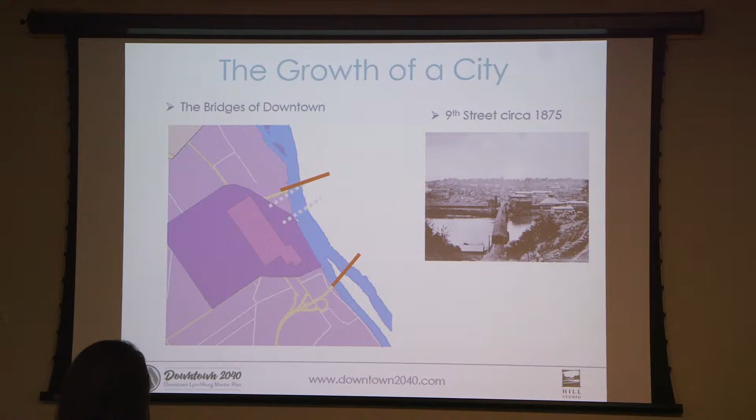Originally into downtown, you came in at 9th Street, and this is the 9th Street bridge circa 1875. Then it pushed away to the Williams Viaduct on 7th Street, the John Lynch Bridge at 5th Street, and Carter Glass at the 29 Expressway. These are the different bridges.

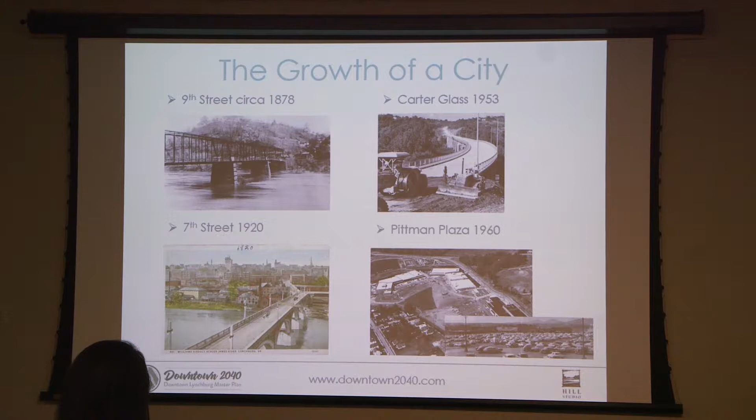What's also interesting is we're not building infrastructure like we used to. This is the Williams Viaduct at 7th Street, what a beautiful bridge. And we replace it with things like John Lynch, a major gateway to our city that was constructed in 1988.

And I'm back here somewhere playing the trumpet. I remember this day very well.

And just as the transportation improvements went around Lynchburg instead of coming into center city, the transportation improvements also had a profound effect on the neighborhoods in the downtown.

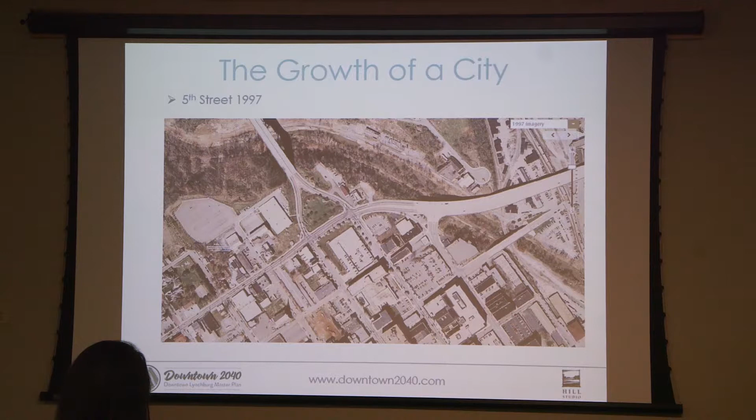Between 8th Street, it can be argued that this is really the reason we are here this evening. It's the reason why we've had a successful downtown, and the reason that quite a bit more can be accomplished.

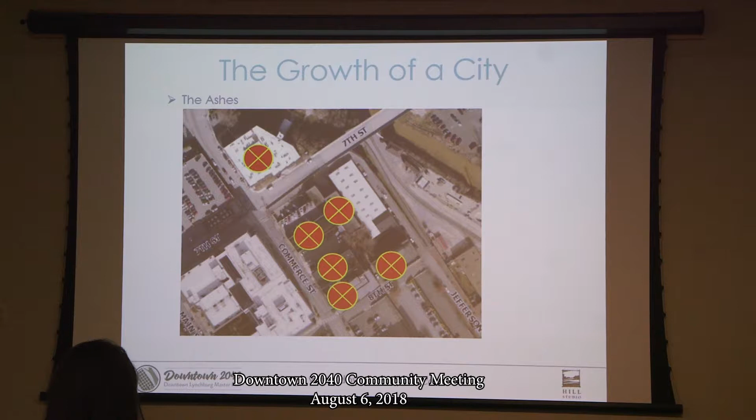In 1998, the new community development director at the time, Rachel Flynn, received word that these 6 buildings were going to be demolished, to make way for surface parking areas.

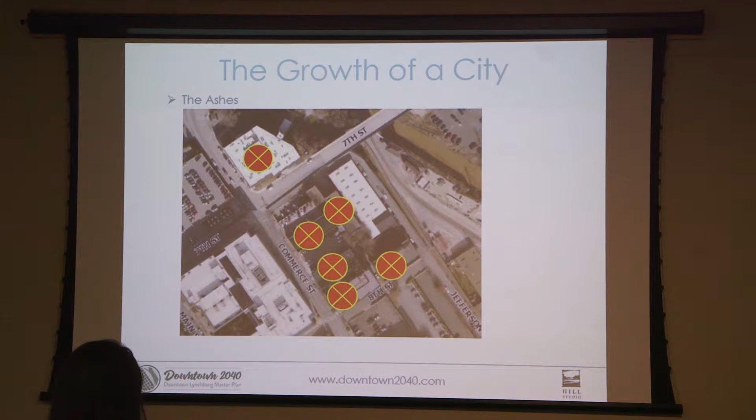Rachel started forming relationships with the owners, historic district people, leaders, the Lynchburg Historic District Foundation, the National Trust for Historic Preservation, the News and Advance, and other local leaders to bring attention to the plight of these buildings.

Rachel, local leaders, and the citizens of Lynchburg at the time did not accept the status quo anymore of tearing buildings down and building surface parking lots, because once you start to lose so much of your history and your fabric, you pass a point of no return.

Albert Einstein said we cannot solve our problems with the same thinking that we used when we created them. This is so true, because after those buildings were saved, the city and the community embarked on a master planning process that led to the creation of the 2000 Downtown Riverfront Master Plan. Part of that kickoff, Mayor Joe Riley from the city of Charleston, South Carolina came and shared his vision of Charleston with

I'm sorry, I'll hold the mic up.

He came and shared his vision of Charleston with us. And when Mayor Riley was asked, well, how are we going to fund these improvements? His response was, it's not about the money, it's about having a vision. And that is so true. It's about having a vision. And that's what we're going to talk about tonight.

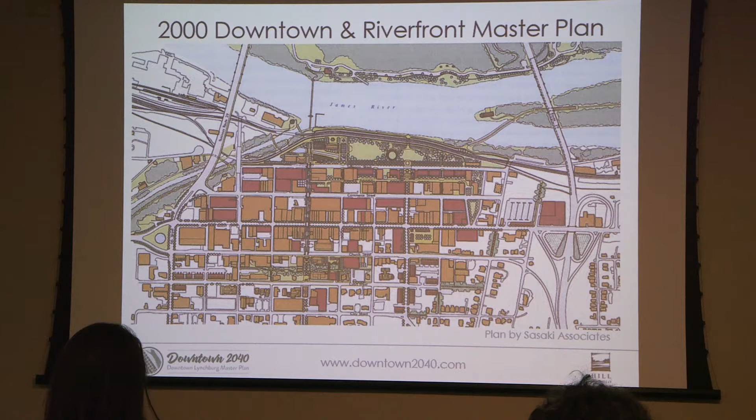One of the things the Sasaki plan recommended was urban infill—you've got a number of buildings shown in yellow that can be infilled with the red ones you see. Another was that it elevated the park system, shown in green, to the stature of the other downtown pieces, thinking about this for the first time in Lynchburg—the riverfront park, Amherst Park across the river, Percival's Island, and smaller places downtown. The park system became a very important player. The third piece recognized, for the first time in planning, the importance of the James River in orienting many of the things that go on downtown. That was the blueprint 20 years ago.

Here's your new blueprint, what we call the 2040 Downtown Master Plan. A lot of the work of the Sasaki plan is continued and sustained—we're not finished yet. The dark colored buildings are ones that still have infill opportunities, and you'll see the continued importance of the park system. But you'll see other things in this plan that make it a little better: we're going to continue the progress of the 2000 plan but go a little further, taming the car and recognizing its place in a thriving downtown, adjusting the city to make every downtown space walkable, living, and enjoyable. After all, in addition to the businesses, you now have over 900 apartments and over 1,400 people living in this downtown.

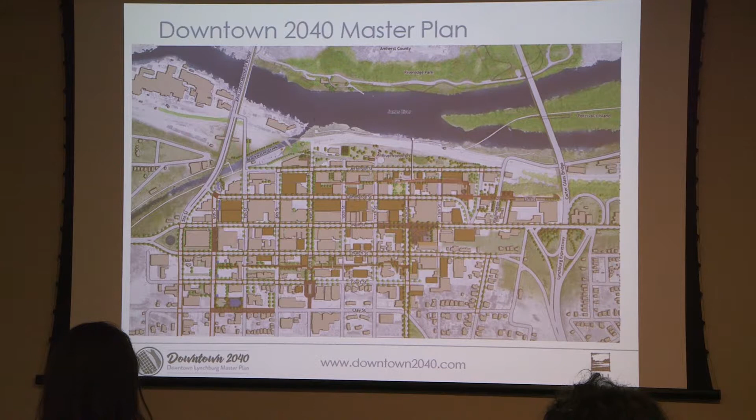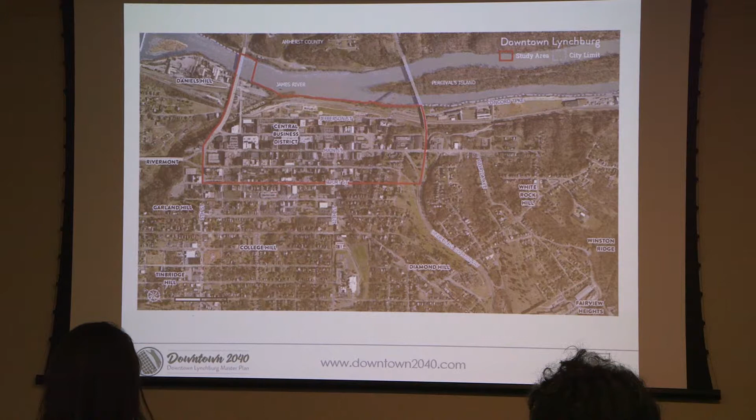The next several slides show some of the building blocks of how we're coming up with our plan—we call these the basics. One of the basics is the study area. The red area on this map was the study area of the 2000 plan, and we're going to continue with that general study area for the 2040 plan. However, we'll be expanding beyond that border to look at inner neighborhoods and going down the river a bit to capture some of that, so this plan will look at how we connect a lot of the neighborhoods into the downtown.

If that wasn't enough, we did a big kickoff event. Many of you might have been there, where we had gigantic chalkboards where people could write down what they thought they really would like to see in downtown. We had online surveys, and there's a notebook of all that data that has come in that is as big as a telephone book. And we had a web page that was up during the entire process so that people could comment and react to the things that they were starting to see.

So you might have gone to some of these other things. We had listening sessions, especially focused to certain issues. We had pop-up events - I don't know if you saw the planners around town with their little tent and some of these flags, and they had a big bowl of Reese cups to try to get you to come and talk to them, and it was pretty successful. And we had a design workshop where the whole design team came and worked for the greater part of a week at the Craddock Terry, coming up with some ideas.

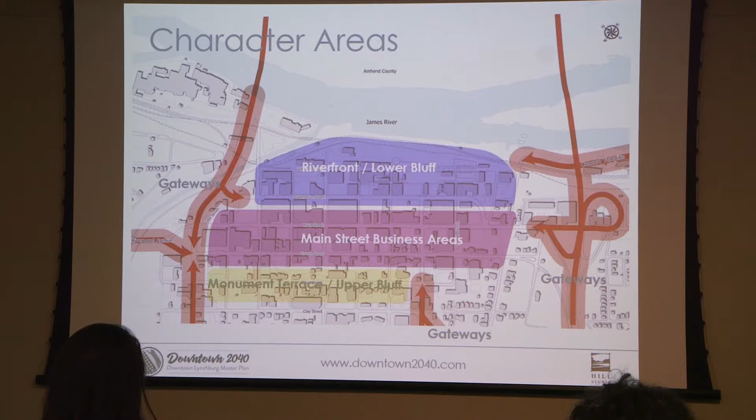And so I take a look here. Down next to the river, you have an area we've identified as the lower bluff, the riverfront and lower bluff area. Up in the middle, Main Street business areas. And then up at the top of the hill, you've got the Monument Terrace upper bluff. And then a fourth character area really is the gateways - how do you get to downtown? Everybody comes into downtown from one of these gateway areas. And so if you look at this, not many places have any of these, especially to have 4 of these is quite remarkable.

So, you know, the lower bluff has 18th, 19th century warehouses and factories, and since so many of them have been saved, a lot of them are sporting new uses, and it's quite unique and different. Walk up the hill just a couple of blocks, and you've got the Main Street business area. And these are 19th century buildings that were designed for multi-use, and they continue to host multi-uses. Very interesting and different from those others.

And if you've got enough energy, you walk up a couple more blocks, and you get to the top, Monument, or the upper bluff. And this is where the institutional character is - this is where the old churches, the courthouse, the police station are, you know, it's on the high ground, which is really interesting as a metaphor. The fourth piece, as Tom introduced us, are the gateways, and Tom mentioned it - Lynchburg has wrestled a lot with the 20th century gateways, but there's a real opportunity in these gateways now.

Okay, so buildings. Buildings, of course, are a very important part of your downtown, and the composition of the buildings is a unique and cherished asset. In fact, over 50% of the survey respondents in the online surveys discuss, in some way, old buildings as a key resource.

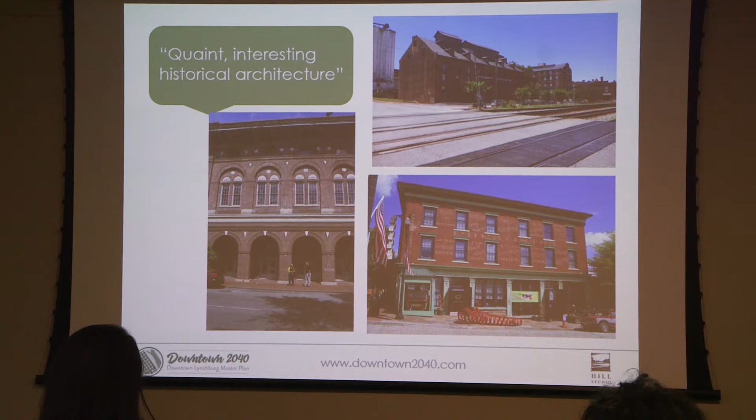Lynchburg has been very good about putting surrounding neighborhoods on both types of registers, but downtown has largely remained only on the National Register. The plan recommends creating local historic districts downtown to permanently protect the resources.

With the National Register District, resources like a historic renovation are protected for only 5 years. A local historic district will protect the resources beyond that, provide design guidelines specific to downtown and its character areas, and could prevent inappropriate demolition.

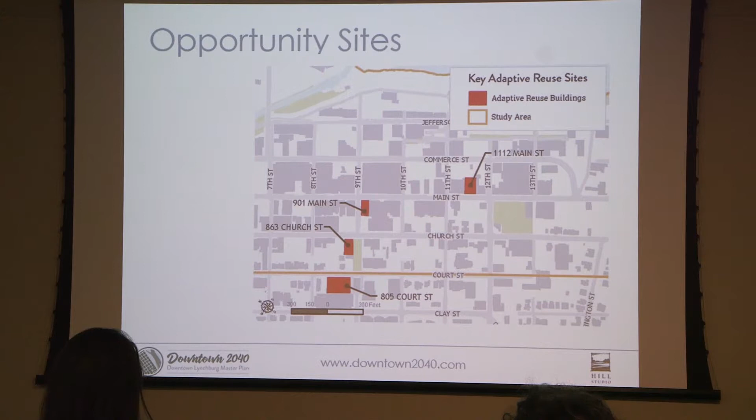Looking at Lynchburg's architectural character, we experimented with four different key adaptive reuse sites. This one Lynchburg has been working with for quite a while, and we asked our architects and architectural historians to generate ideas that might spark even more.

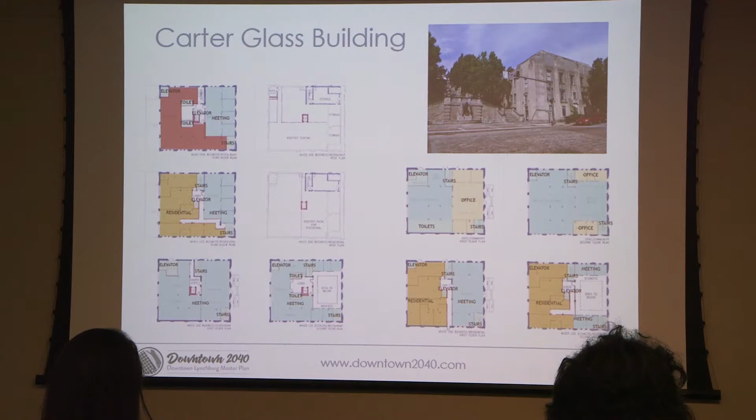863 Church Street, the Carter Glass Building, was previously studied by CJMW as a multi-use building, and these plans are available at City Hall.

1112 Main Street and 901 Main Street were studied for their adaptive reuse potential. These are monumental buildings, very difficult to adapt to just about any use, and at that time they were both for sale.

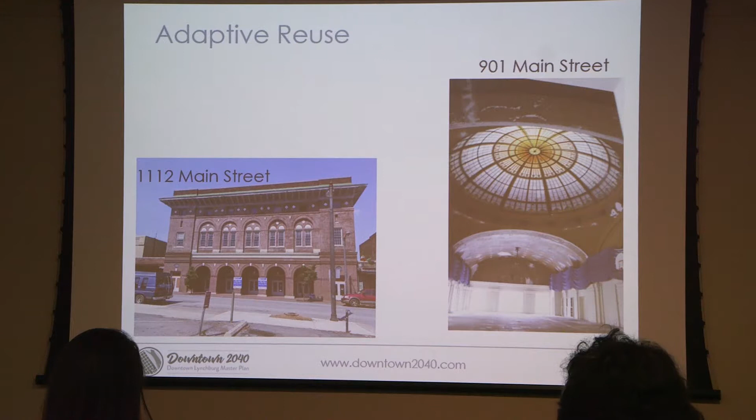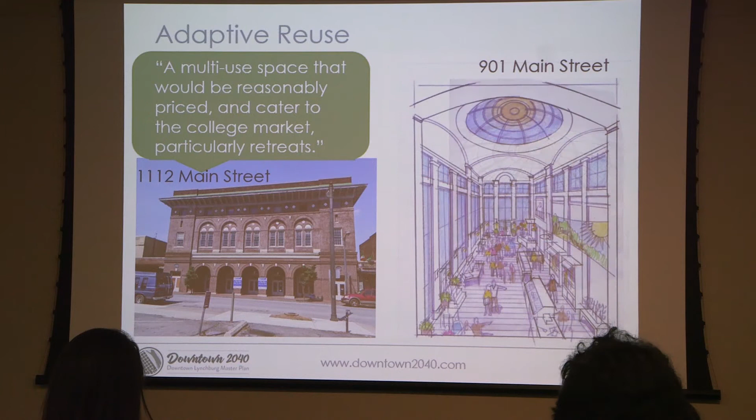Both buildings had extraordinary potential, like the dome on the skylight at 901 Main Street. We studied both, and 901 Main Street is going forward as a public event space, right next to City Hall—it's going to be pretty exciting.

Downtown isn't just buildings and streets, it's parks too. We segregate this into two categories for study: large parks, about promoting growth and economic development, and small parks, which imbue green space into downtown, making it much more livable.

There's been a real emphasis in this plan on the importance of gathering spaces, making downtown work for people and for people at home. So you'll see a number of parks placed on the map and studied in more detail.

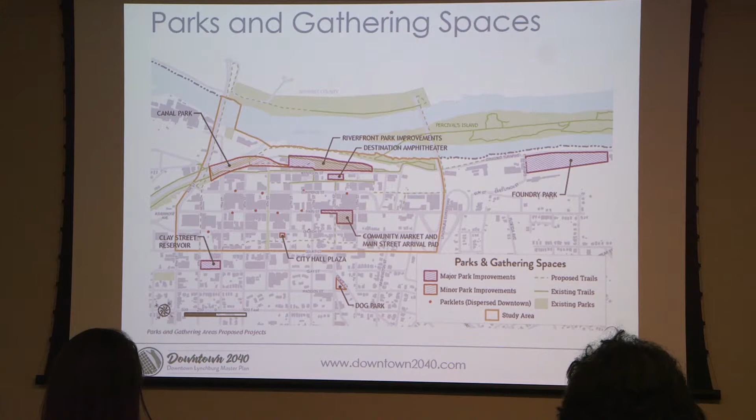In the last several years, Lynchburg has started hosting concerts in Riverfront Park, and they've been extraordinarily successful. So we started studying how to make that even better.

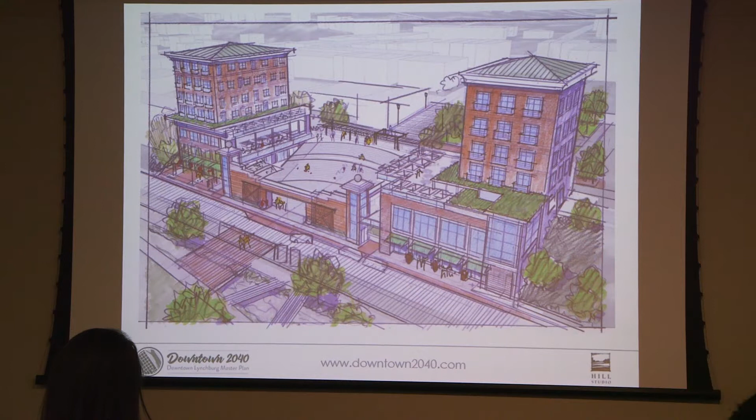One scheme addressed ideas from the public meetings—could there be a public-private partnership using both types of land, incorporating the Bluff Walk to create a theater for about 4,500 people while still solving some of the urban design issues.

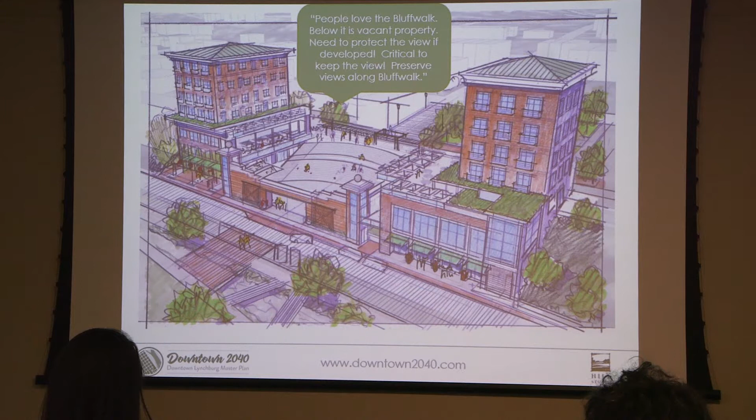Then we looked at Riverfront Park itself. It's a very linear park with some constraints, particularly the railroad tracks. Lynchburg, since the 2000 plan, has continued to plan for its Riverfront Park.

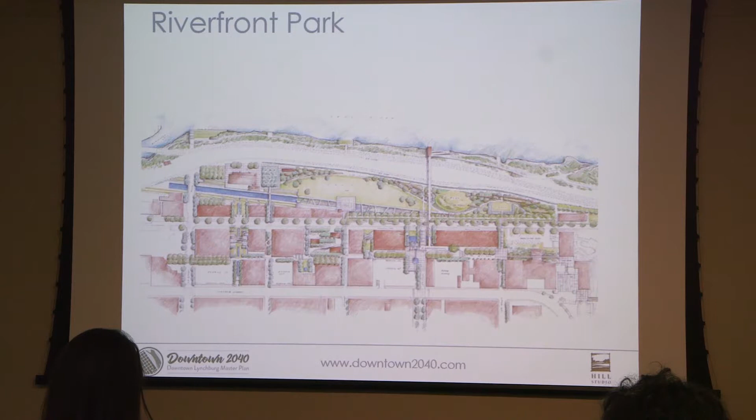This is a 2006 scheme by Nelson Byrd Woltz, showing how you could celebrate the canal and use a number of green spaces in the park. So here's a bit of an update on Riverfront Park.

The labels here show additions we might suggest—for example, near the spray grounds, a playground and public restrooms available for everyone, and a bike trail continuing through the park: the future Riveredge Trail on the outside of the railroad tracks, which could be accessed by a bridge across.

On the right-hand side you'll see a potential amphitheater alternative in Riverfront Park. We studied whether it could fit well, and it could still accommodate about 4,500 people.

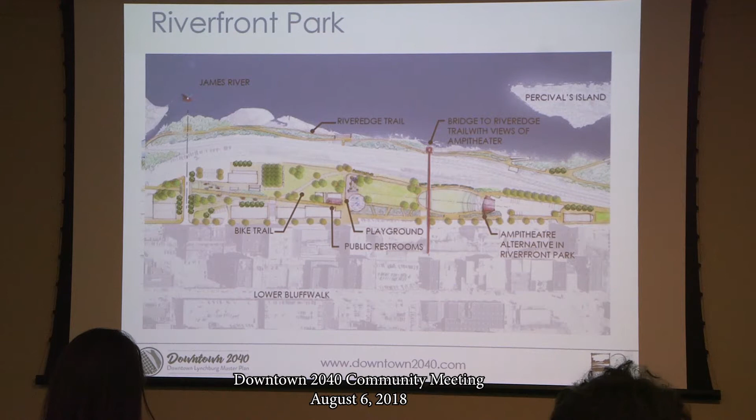One idea finally getting some legs is a canal park, just upriver from Riverfront Park. For historians, Canal Park is really ground zero for Lynchburg's industrial and transportation history, and a lot of it is still there.

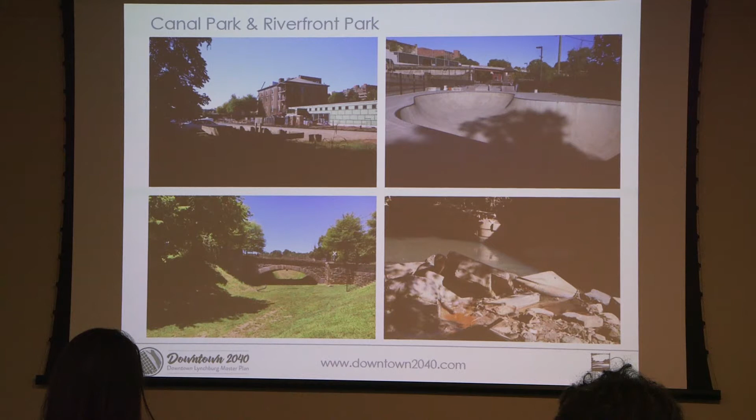In the Canal Park area you see Amazement Square and its addition, the skateboard park, and in the lower pictures some of the old bridges and canal locks still there—you have to get down next to the river to see the stones that could be put back into place.

The plan for Canal Park is really about connecting the dots. In the lower right picture, you see a way to connect the greenways from the Blackwater Creek Trail through this park and on to Riverfront Park. There's a way to do it—it's really kind of threading the needle.

And you'll also see on the upper sketch there, stairs to connect the street. That's Commerce Street - there's a way to get through there too.

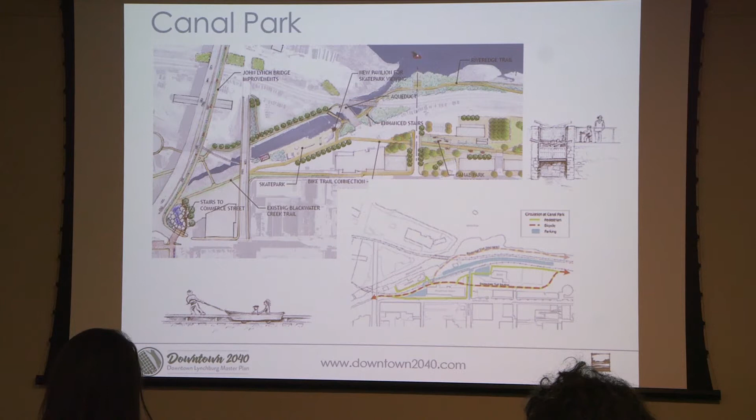So the Canal Park is a very interesting and different kind of park. It's an interpretive history park, and it kind of connects a lot of these other happening park resources.

Foundry Park - a lot of people know this area also as the Intermet site. There were a number of different comments that people really wanted to access the river, in a lot of different forms. And boy, do we have a site for you.

This is just downstream from downtown, and you'll see here a conceptual plan for Intermet Park, or Foundry Park. One of the things it does is take the Concord Turnpike and wrap it around the back of that park, still allowing truck access, but allowing for parking and boat launches.

And then the entire rest of that old foundry site can be turned toward the river, so people can walk from the river back into the green spaces. It's one of the very few places where you can actually access the river from the ground.

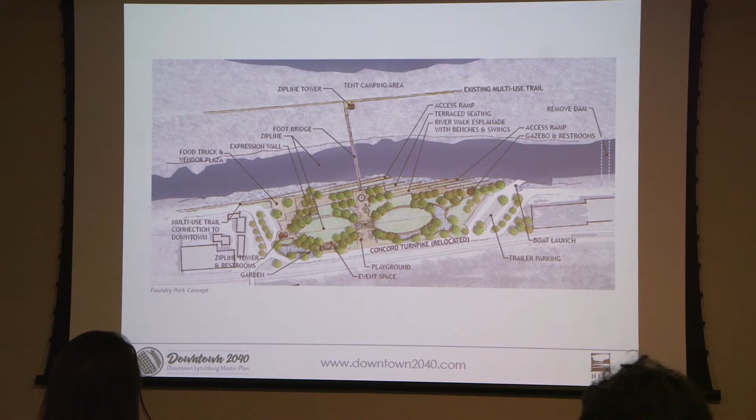So this will be completed with a number of access ramps, terrace seating, et cetera, to really celebrate the river there.

Now, there are a number of other small parks in the downtown, and the purpose for the small parks is to really create great and livable downtown places for all the residents, and to extend the season year-round.

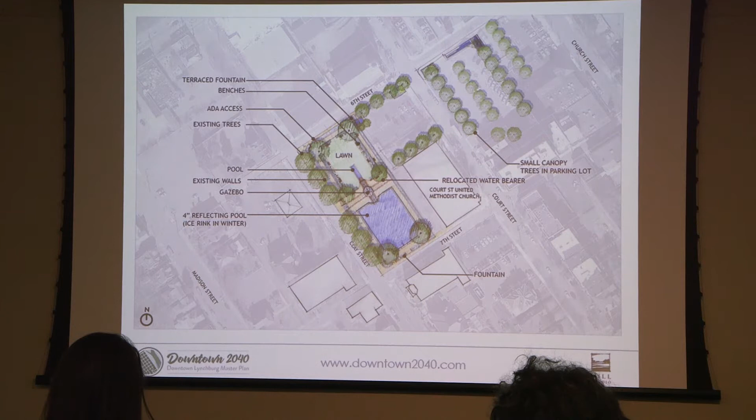This is the kind of thing that would help Parks and Rec extend the season for all Lynchburg residents, and also be a real amenity to the local residents nearby.

City Hall Plaza - this is an existing parking lot at the base of that big elevator. It's just one of these places that has great potential. It doesn't really change the use too much, but it really makes it more of a celebrated downtown space.

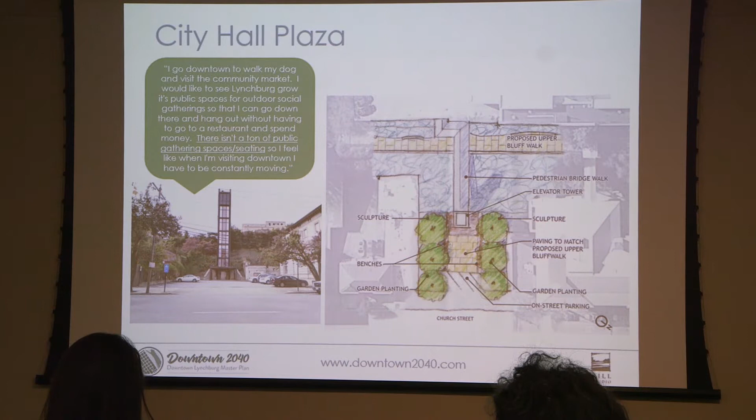This was one of the longer quotes, but this person was discussing how you could really make each small downtown place rich as a part of this. He said there isn't a ton of public gathering spaces or seating, so this is to try to address some of those needs.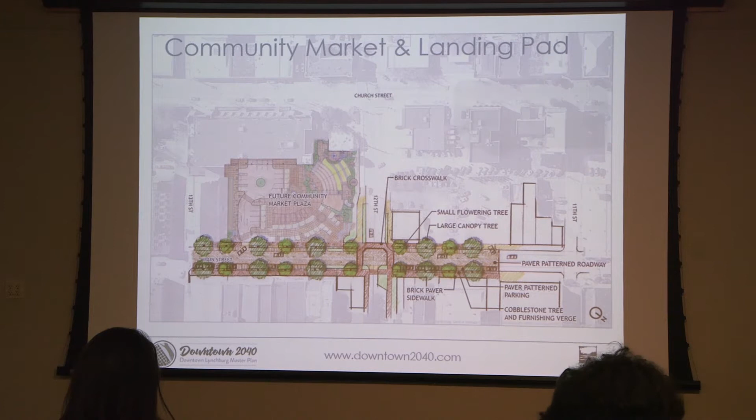So here's a plan view of that, and it would become a gathering place. And here's a little perspective of it. You can see the landing pad on Main Street on the left side of the illustration, and how the farmers market could be joined to it, making this a really nice destination outdoor place.

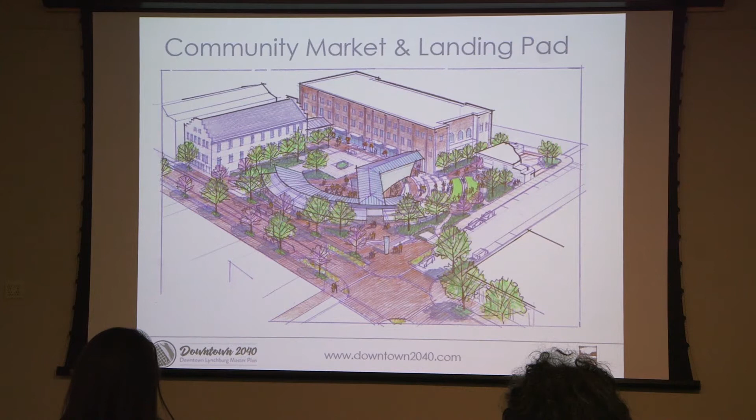The scenery of some of these trails is one of the most cherished assets, discussed at length in some of the public engagement notes. Lynchburg's done a terrific job with the Bluff Walk, celebrating that scenery. And that's nothing new - Lynchburg is no stranger to siting walkways to get the great views, ever since 1925, taking advantage of that scenery to make an interesting walk up and down the slopes.

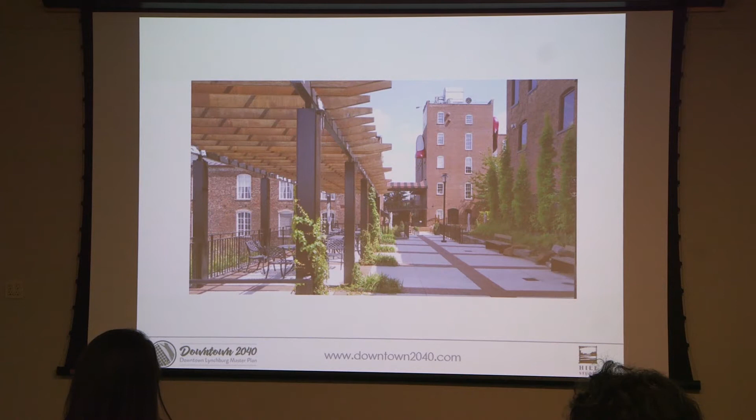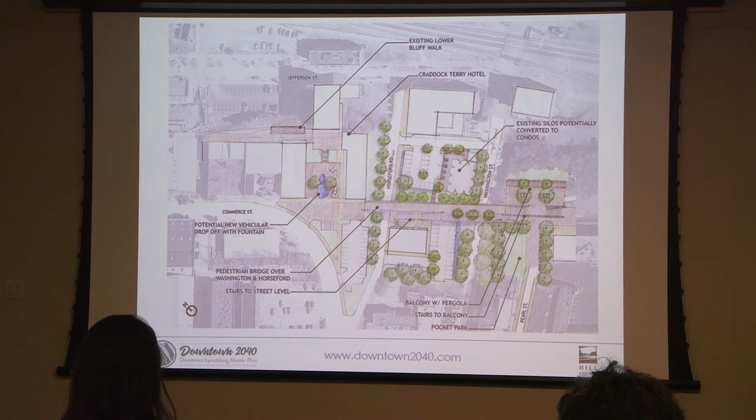So we couldn't resist continuing some of the excitement that the Bluff Walk has generated and extending it. In this illustration, you'll see the existing lower Bluff Walk ending at about the Craddock Terry Hotel, but there's a way to make it go up the slope a bit and then continue on an old public right-of-way across Horseford, across Pearl, with pedestrian bridges connecting some of the more recently built hotel properties. That kind of investment would help incent new investment in that gateway area right to downtown.

Another one of the pieces is what we call the Upper Bluff Walk, and this was in the original 2000 plan, just a little bit more updated and detailed version of it. That would be up there near the top of the hill, right next to those institutional uses, and it would be very similar to the Lower Bluff Walk, except the views would be even better.

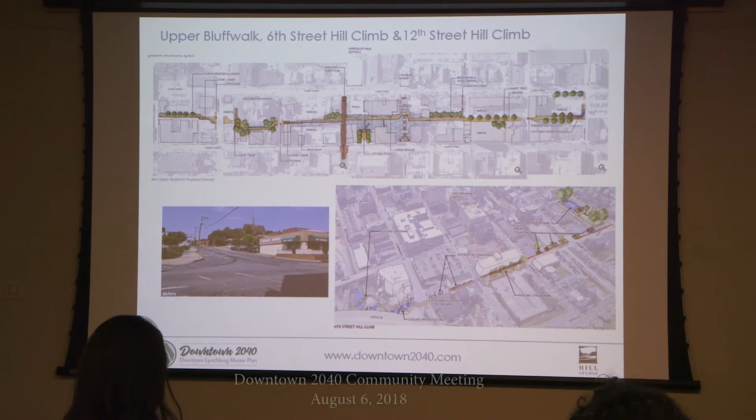Connecting Lower and Upper Bluff Walk are what we call hill climbs. The one in the lower right would go up 6th Street, making it an entertaining climb with interpretive things. The one on the left will be the 12th Street hill climb—you see this existing picture, and this is what it could look like once we get that landing pad in there and turn to take people up to the upper bluff walk.

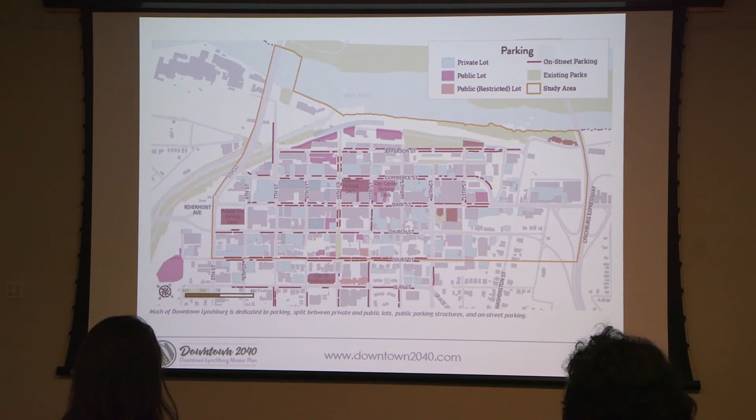So we started looking at what's a more logical condition. What if parking in the garages didn't cost a lot, because you're doing all the foot effort once you put the car in the garage? And maybe on-street parking right next to these stores should cost more, because, my goodness, you're paying for the convenience, right? So there's kind of a free market approach to this issue. Successful downtowns already have it this way—they've already done it. This is a place Lynchburg needs to look to solve some of these parking issues.

Now what it'll do, if you can implement this—we call it park once—the idea is you get to downtown, you put your car in a place where it doesn't really cost a lot, and you walk around, you park once to get to a lot of things. Successful implementation of that will start to change the real estate market to facilitate those private parking lots becoming building sites. That's what that's about.

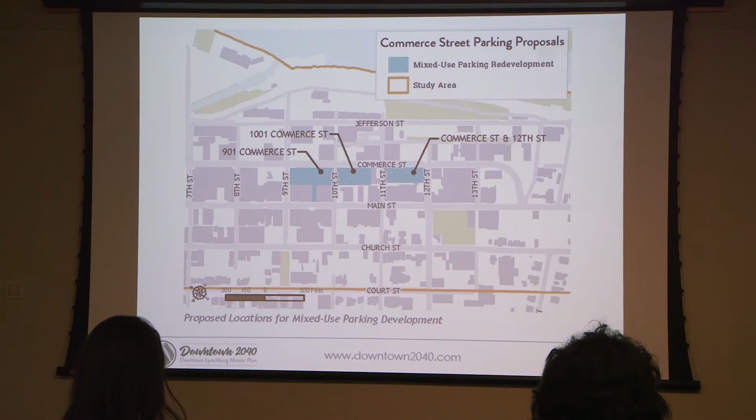Now here's part of that equation too: how do you make parking in the garages work and make it better? These are the 3 sites that were studied and recommended by previous parking studies to continue working with—2 are existing garages, 1 is a potential garage. The idea would be that since these are central to almost everywhere downtown, as these garages are replaced and adjusted, they can park just as many or more cars, but it doesn't have to be just a single use, because walking by 1,000 linear feet of parking garages is a pretty deadly experience.

As parking garages are replaced and upgraded, you can put just as many cars in the garage, but take the first floor and make it retail, something exciting along the street, and take advantage of the top of the garage, turning it into something that could really benefit downtown, like a hotel.

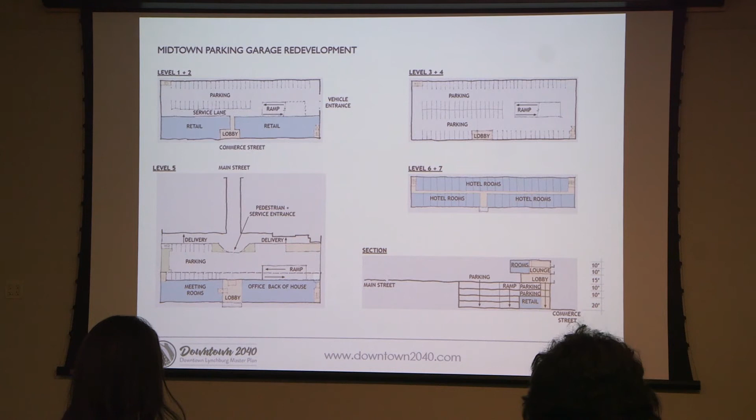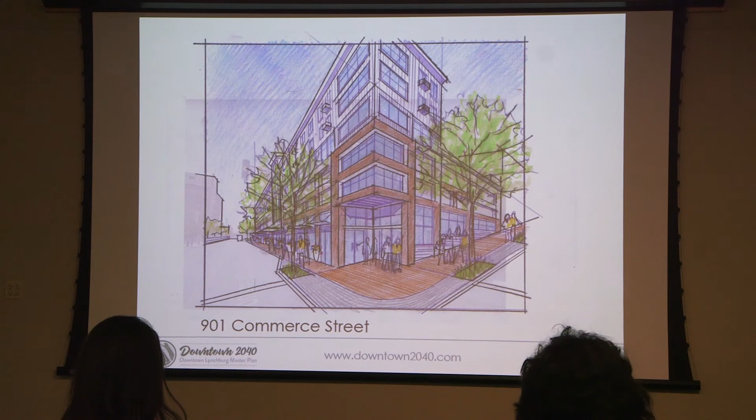This sketch shows the existing condition, and walking by that garage is pretty dull. After 400 or 500 feet it's just the same. But what if it could be something like this, where it didn't feel like a garage? You're getting the same number of cars, but using retail to enliven the space, and you can go up higher. You can also use the elevator creatively to get people up those hills downtown.

Along those lines, the plan addresses transport and mobility. Tom's slides of the infrastructure improvements of the 1950s through 1980s showed a city concentrating on getting citizens through it, like there was no reason to be downtown. Well, now there is. So we want to plan for it, and we want to plan for walkability.

Now, in order to do this, the street directions need to change, and there are myriad reasons to do it. We have here the major one-way couplet in downtown, which, following the last three or four traffic studies proposed, would be converted back to two-way traffic. There are many reasons to do it—I'll just show a couple of examples.

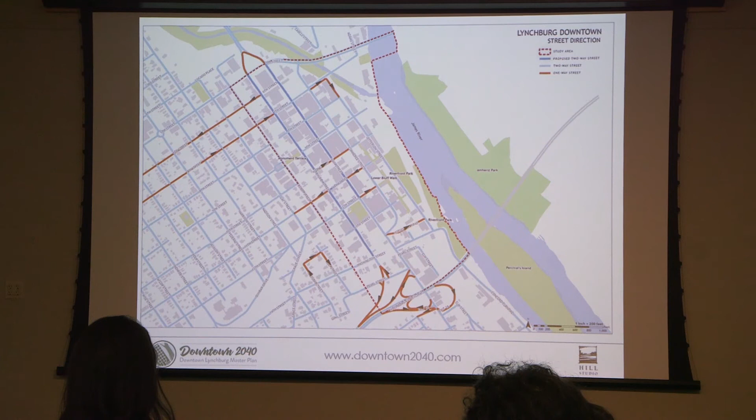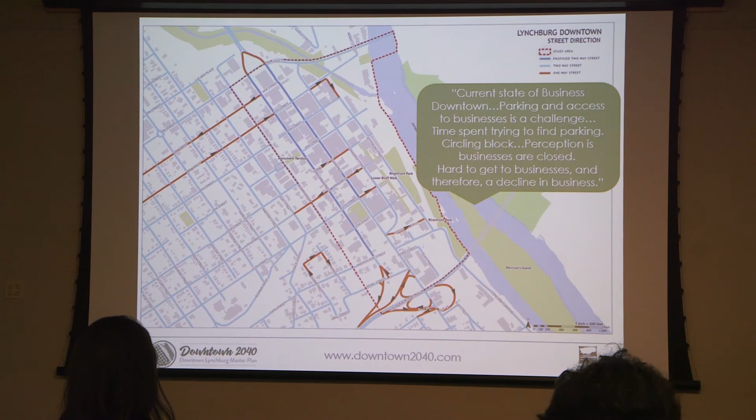One is what citizens told us: people spend a lot of time circling the block, especially with the one-way streets, and find it hard to get to businesses. But probably more of a concern is that in a two-lane, one-way situation, when a pedestrian starts to cross the street, the car on the left stops for him, but the car on the right cannot see that pedestrian, and it's very dangerous. This happened to me right in front of city hall.

A second issue our traffic planners discuss is retail eclipsing. On one-way streets we see the stores in front of us as we travel across the cross street, but the buildings near that car are not seen. Those are called eclipsed buildings, and this translates into a lack of economic development—compared to two-way comparables, these buildings do not do well.

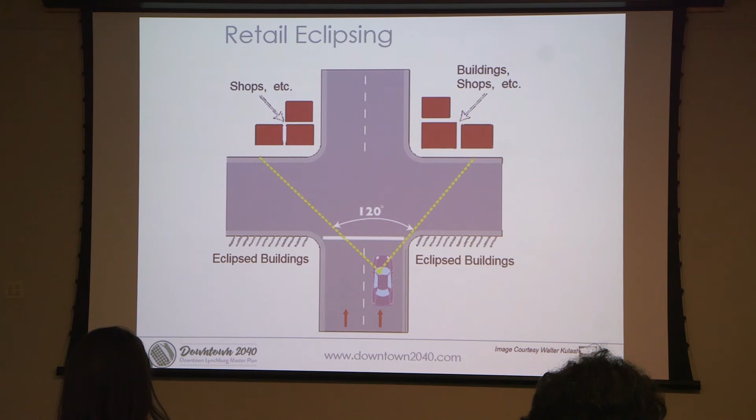Changing to two-way complete streets with shared bike lanes, parking, and walking is the trend in successfully revitalizing downtowns. All the places our traffic planners worked in, including Wade Walker with Alta, have successfully solved the delivery issue on a case-by-case basis.

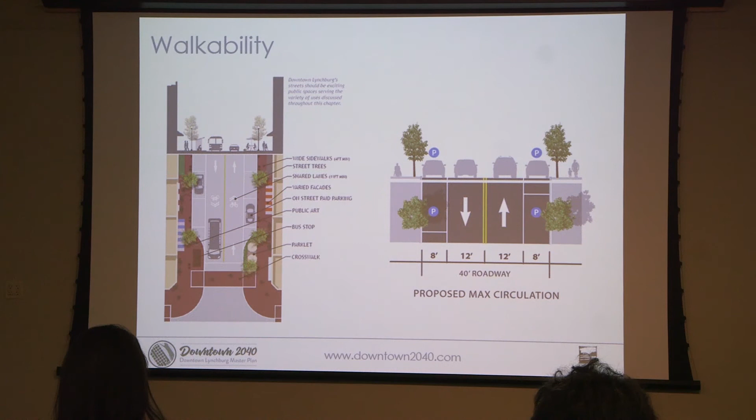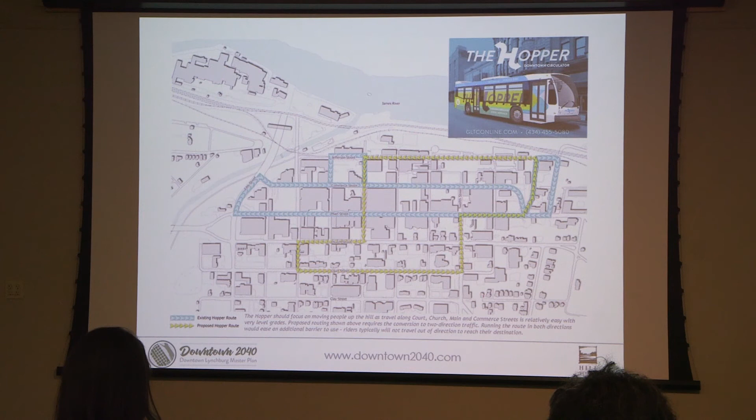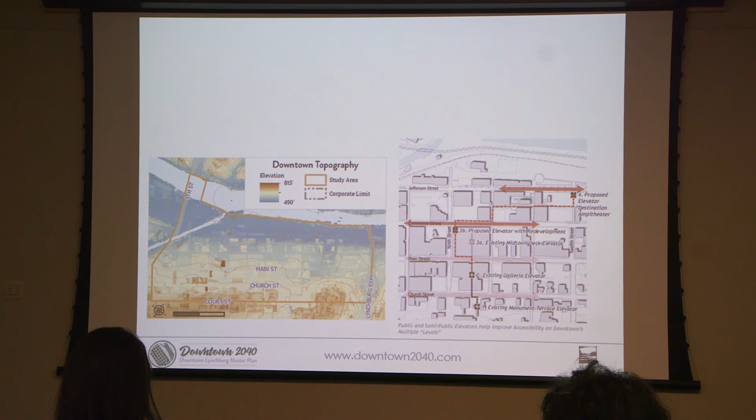We also studied the hopper, and one recommendation was to have the hopper go that yellow route so it can help get people way up the hill rather than them having to walk the entire hill. In fact, dealing with topography, one solution is better utilizing a series of public elevators to get all ability levels up and down that hill from the river to the institutional uses.

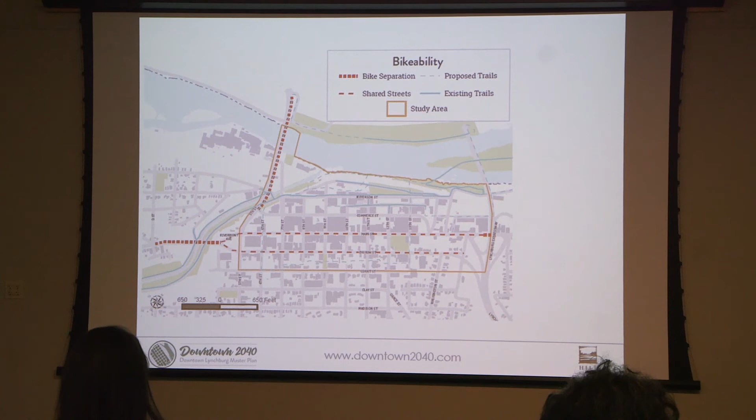Now, bikeability—you don't see bikes in Lynchburg the way you see in other cities, because if you ever tried to ride up the hill, you'd realize what an issue that is. So in the plan we're looking at subtle ways to get bikes up the hill easily, by walking them up stairs, and even looking at some motorized methods you'll see in the book.

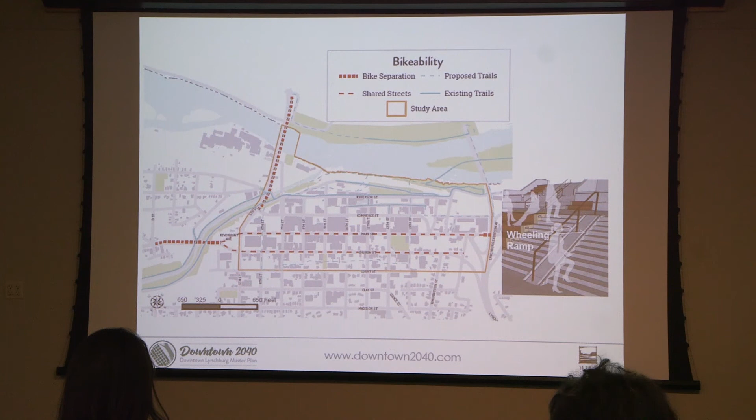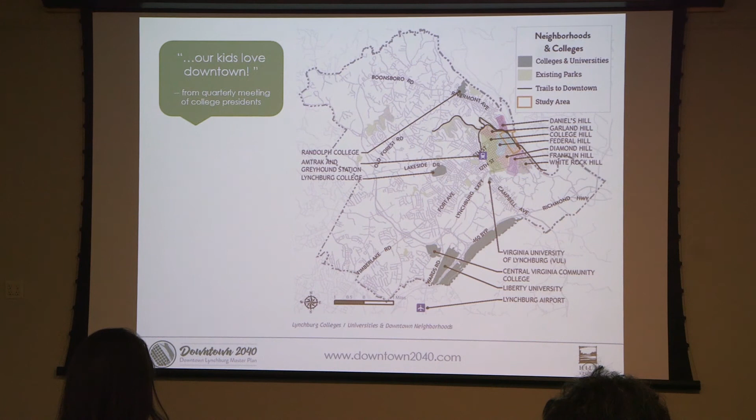So not only do we look at downtown, but we look at how you connect downtown to the inner neighborhoods, to the outer neighborhoods all around Lynchburg, and to the 6 colleges nearby, 5 of them within city limits. This seemed to be a real opportunity for Lynchburg to take advantage of the growing college community.

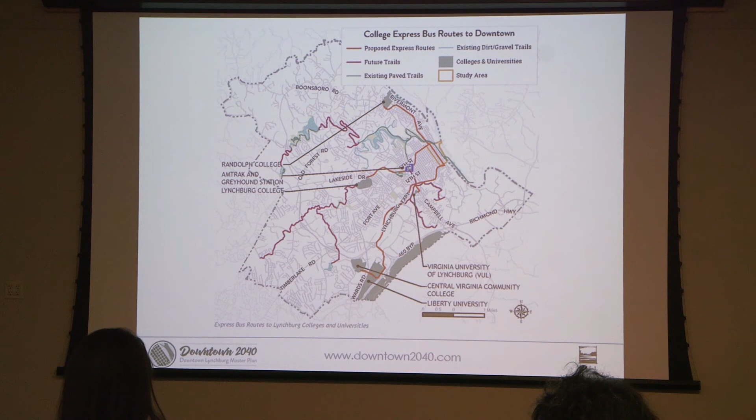This was an idea that came about after talking to some of the college folks: maybe there can be an express bus system that supplements the existing bus system, getting people from the outer neighborhoods and from the colleges right into downtown, minimizing their travel and stop distances along the way. This is discussed thoroughly in the plan.

Not only that, but maybe there's a way to extend the bike lanes out to help get folks from the outer neighborhoods, and particularly the college areas, into downtown. Maybe we should provide lighting along them so commuters could use them in the winter, for example, when you have to ride at night going in and out of downtown.

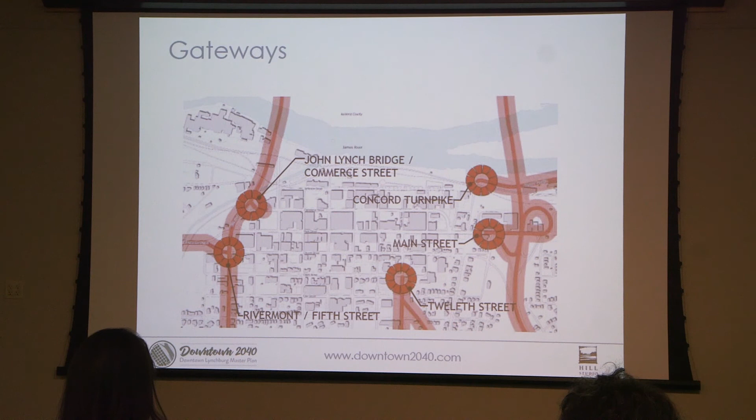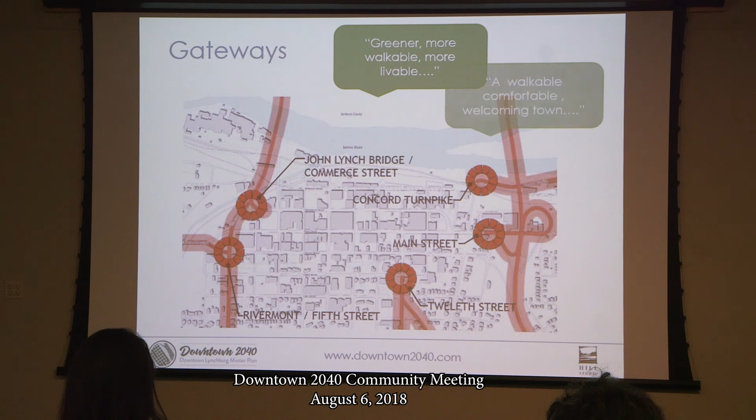Finally, gateways. This is how we introduce people to our downtown, and there are a number of them you can see here. This is along the same theme of a number of our other goals: greener, more walkable, and more welcoming.

But when you really think about that Main Street, it's 4 lanes going across there, and since there's not too much developed on the right, maybe you could make it a 2-lane bridge and give another lane to trees, to bikes, to pedestrians.

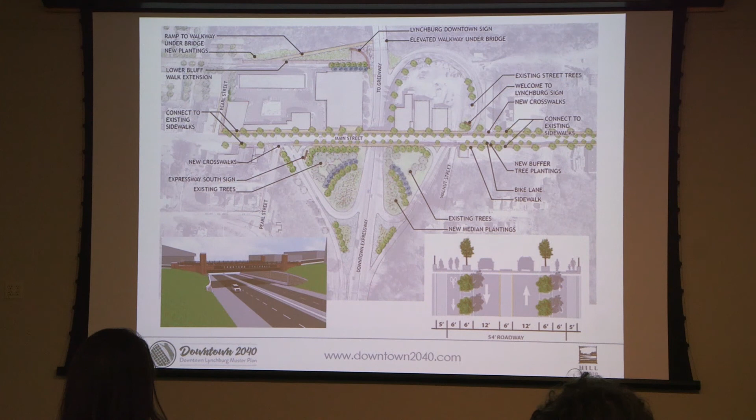Similarly, we looked at the Lynch Bridge and how it has changed over time, it doesn't have the traffic counts it used to, and you could implement this kind of idea right now to get pedestrians and bicycles across the river to some of the beautiful work Amherst has been doing, a way to access the river right now from downtown Lynchburg. You might invite Amherst Park visitors to come across and have lunch.

A similar scheme worked out on the bridge that connects to the north of downtown.

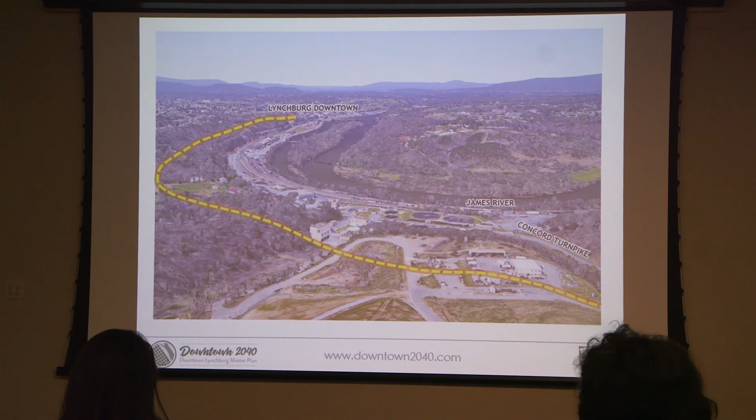So we even studied how that might occur, with a real long-term gateway experience from the bypasses into downtown.

So I know that's a lot to get through, and I was just trying to touch on the very surface of this. What is this? It's a 20-year blueprint for downtown. Over the last half hour, we've talked about what Lynchburg really can be, how to take the city to the next level.

It's going to take everybody to do it, and it requires that we think differently. Solutions that worked to get you this far will not work to get you to the next level. So I'm going to turn it back over to Tom, who's going to tell you how you can express your support.